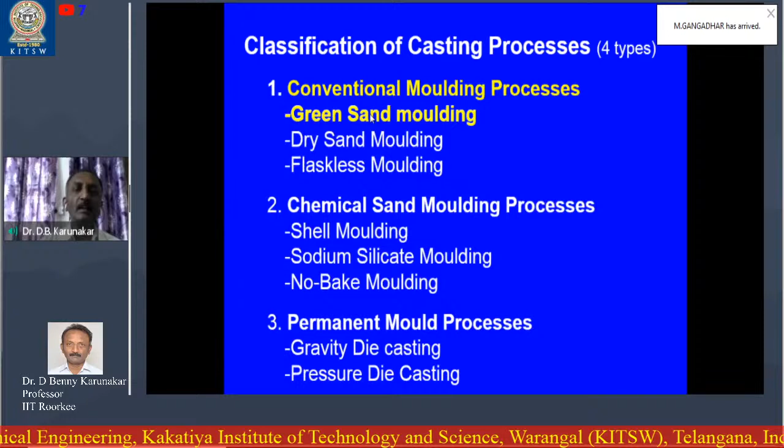Next, let us go to the challenges in the sand casting process. Now, first one is the green sand molding process. First of all, what do you mean by green? Green means the presence of moisture. When moisture is present in the sand, we call it green sand molding.

So this is how a green sand mold looks like. Generally we use two molding boxes - one is the drag, another one is the cope. And this is the cavity, a cylindrical cavity you can see here, and this is the core. Molten metal is poured through this pouring cup - this is the sprue, and it falls into the sprue well.

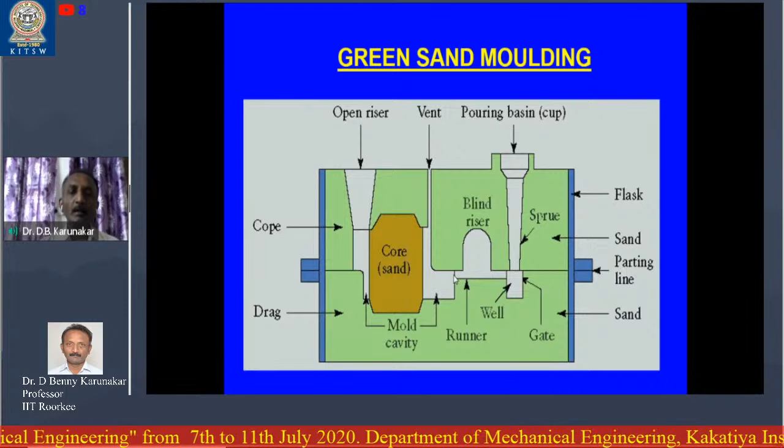This is the runner, and it passes through the runner, flows around the core like this and rises. Here it solidifies, and after solidification we have to break the sand, separate the cope and drag, and we even have to destroy this core. Then we have to take the casting outside.

Here, green sand molding looks like this. This is the lower box, the drag, and this is the upper box, the cope. Molten metal is poured into the mold.

Now, advantages of green sand molding: most of the metals can be cast by this method - most metals and most alloys can be cast except titanium alloys. Pattern costs and material costs are relatively low, and there is no limitation with respect to size of the casting.

A small casting, maybe of the order of 0.5 kgs or even 200 grams, can be made by sand casting. And even a casting up to the weight of 5 tons, even 10 tons, can be manufactured using sand casting.

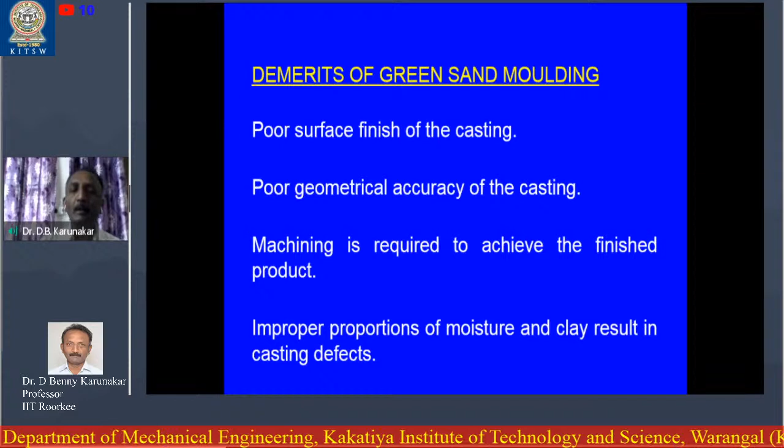So these are the demerits of the green casting: poor surface finish, in that there is no doubt. Poor geometrical accuracy, machining is required to achieve the finish on the product, and improper proportions of the moisture result in casting defects.

Next one is the dry sand molding. This dry sand molding is the green sand molding only, but it is modified in the sense that before pouring, the moisture is totally dried out. The mold is baked in an oven at about 200 to 310 degrees centigrade. The reason is the moisture in the mold may react with the molten metal and form gases and porosity defects, gas defects inside the casting. So to prevent this, we use the dry sand molding.

Advantages of the dry sand molding: defects that arise due to the moisture will be eliminated in this case. What are the demerits? Drying of the mold requires oven and they consume power, electricity.

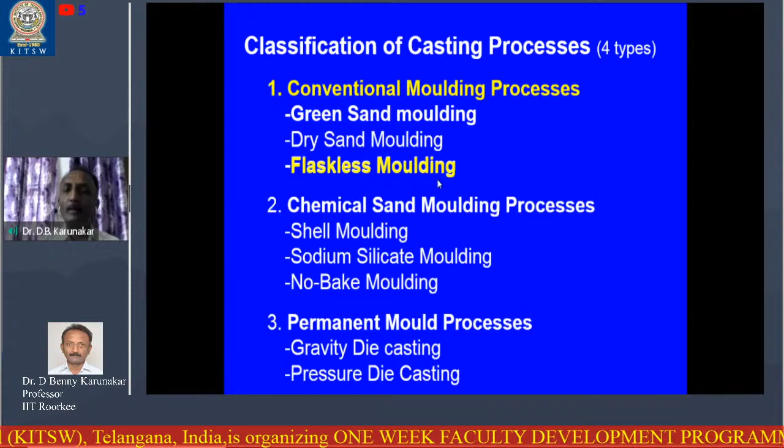Next one is the flaskless molding. What do you mean by flaskless molding? In the other two cases we have used the flask, the cope box, the cope, and these are the drag - these are the molding flasks. We are using molding flask, but here in flaskless molding, we don't use any molding box or any flask. You see here, this is the molding sand, comes like through this.

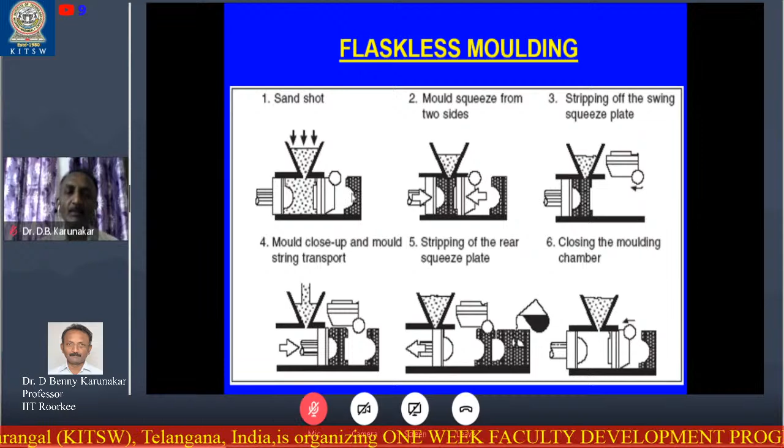And here, this is the pattern of molding sand. Mold and they are assembled here. In a similar way, they are produced and they are assembled. Molten metal is poured. When the molten metal is poured, do you think any flask is supporting the mold?

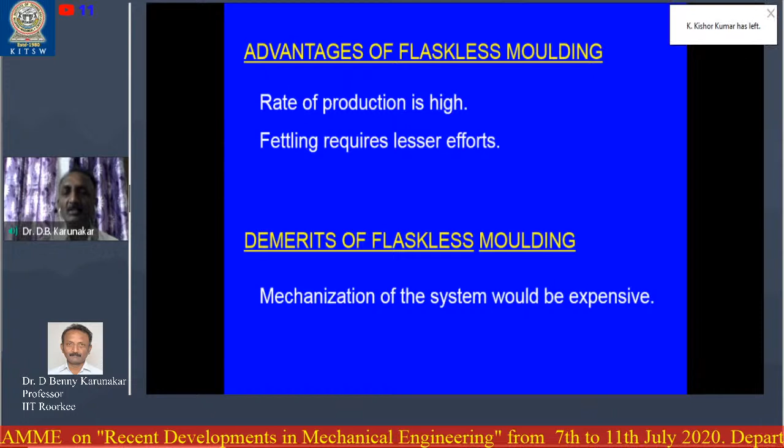No flask. So that's why this is known as the flaskless molding. Advantage of the flaskless molding: the rate of production is high and fettling requires lesser efforts. Why? When the molding box or the molding flask is there, destroying or breaking the mold is difficult. Here it is very easy. And what is the demerit? The demerit is the system requires mechanization, so that increases the initial establishment cost.

So now let us come to the challenges in the sand casting process, or the casting defects. So what is a defect? First of all, a defect is an irregularity in the casting process that is undesired, any irregularity that is undesired. So some defects can be tolerated while other defects can be repaired, otherwise they must be eliminated.

What does it mean? Some defects can be managed - even if the defect is present, still you can work with that, that is the tolerated. Some other defects can be repaired - for example, there is a crack on a big casting, a small crack, so that can be welded, that is the repairing. Sometimes the crack is too big or there is a severe shrinkage porosity defect - in that case, there is nothing we can do except that it should be rejected and melted inside the furnace again.

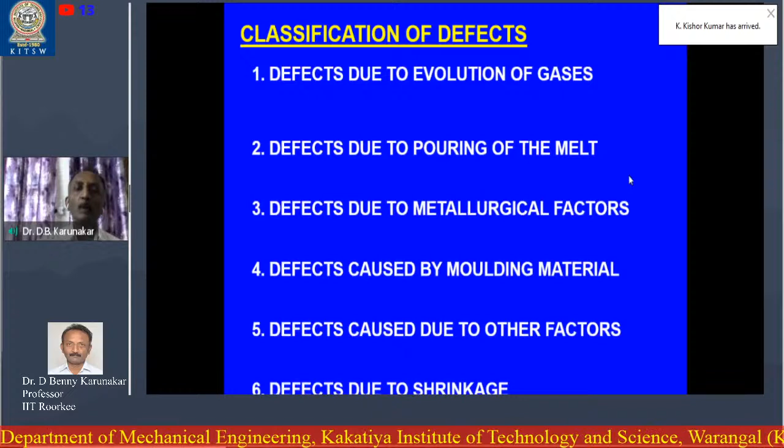Now, let us see the classification of defects. The defects in sand castings can be broadly classified into 6 types: one is the defect due to the evolution of gases; next, defect due to pouring of the melt, meaning something is wrong in the molten metal; next, defect due to metallurgical factors; next, defects caused by the molding sand, meaning something is wrong in the molding sand; next, defect caused due to other factors; and defect due to shrinkage.

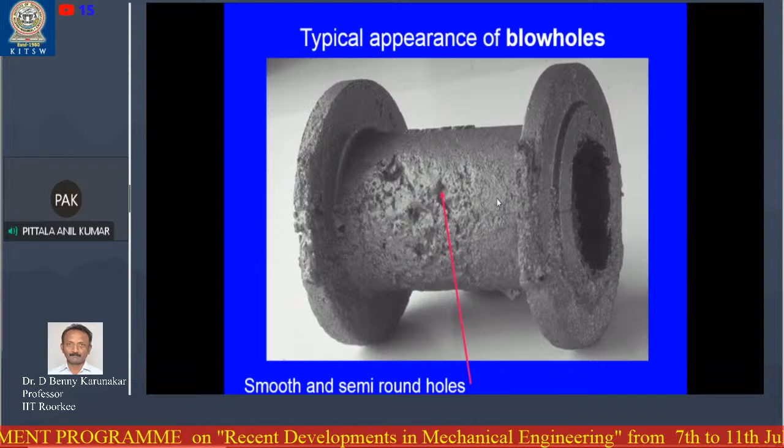So that being the case, the casting has to be rejected. There is no point in accepting this, and it leads to loss to the industry. Now, what are the causes?

Excessive moisture in the mold, slag in the molten metal reacts with the carbon and liberates carbon monoxide, and iron oxide on the mold reacts with the carbon in the metal and liberates CO. So this CO is responsible for the blowhole.

Not only CO, the excessive moisture. So when excessive moisture is present in the molding sand, this moisture comes in contact with the molten metal and turns into vapor.

Similarly, the slag in the molten metal - what is this slag? The slag in the molten metal contains silicon dioxide that reacts with the carbon and forms carbon monoxide. Same is the case with the iron oxide, FeO. So from there, the oxygen reacts with the carbon in the molten metal and forms carbon monoxide.

Now, what are the remedial measures? Provide vent holes, and excessive moisture should be avoided. Excessive compaction should also be avoided. Once you compact too much, what will happen? The mold becomes too hard, the permeability comes down, and the moisture and gases cannot escape.

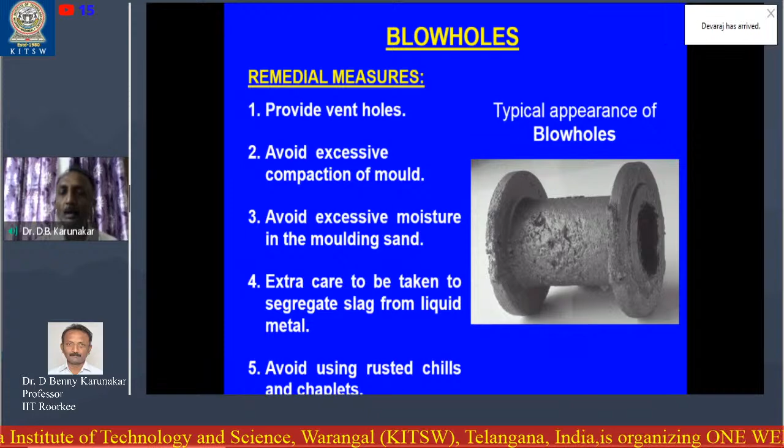Extra care should be taken to segregate the slag from the liquid metal and avoid using rusted chills and chaplets. We use chills and chaplets in the casting process. Why? Chills are used to enable directional solidification, and chaplets are used for supporting the cores.

Sometimes these are rusted. Rusted means that is iron oxide. So once there is iron oxide, there is an oxygen component, and that oxygen component reacts with the molten metal and forms carbon monoxide.

Next, let us see the pinhole porosity defect. This is the typical appearance of pinhole porosity. You can see a large number of uniformly dispersed tiny holes, meaning the size of each hole will be as small as the head of a pin. That is the meaning of pinhole porosity. Too many such holes are there.

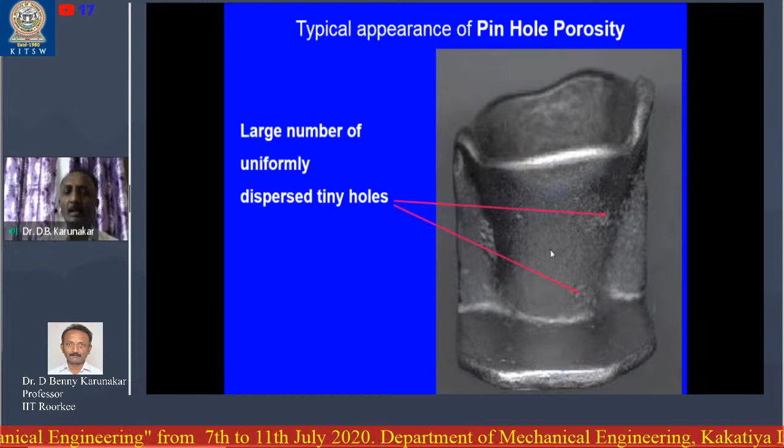The reason is hydrogen is the element responsible for the pinhole porosity defect. The molten metal, especially if you consider aluminum alloys, readily absorbs hydrogen. So this hydrogen, while melting, is absorbed by the molten metal and it comes along with the molten metal, and while the hydrogen is still present inside the molten metal, we pour. During solidification, this hydrogen slowly comes out and forms pinhole porosity on the surface of the casting.

Remedial measures: vacuum melting, meaning the charge or the unmelted alloy is to be melted in a vacuum. Next, if you are not able to use a vacuum furnace since it is very costly, you can use ordinary melting and go for vacuum degassing.

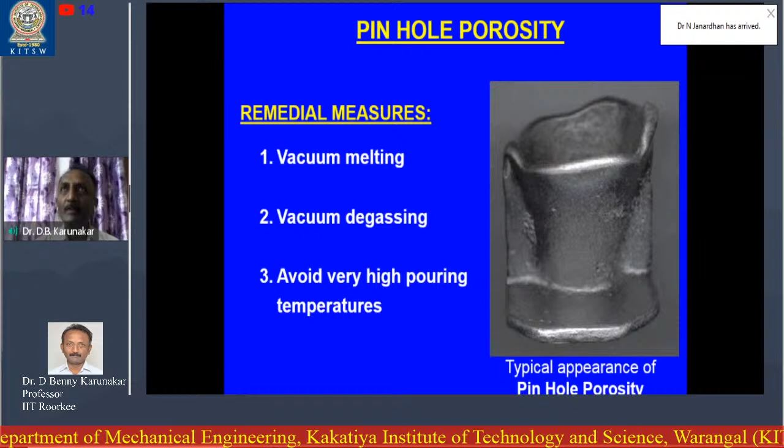Next, avoid very high pouring temperatures. We always give superheating. For example, the melting point of aluminum is 660 degrees centigrade. Beyond that melting temperature, we heat by another superheat, maybe another 75 degrees, up to 725 degrees, or in the worst case up to 750 degrees centigrade. What happens if someone heats it up to 850? It overboils, then it accumulates air bubbles inside, and that could lead to pinhole porosity. So the superheat should be optimum, not too much.

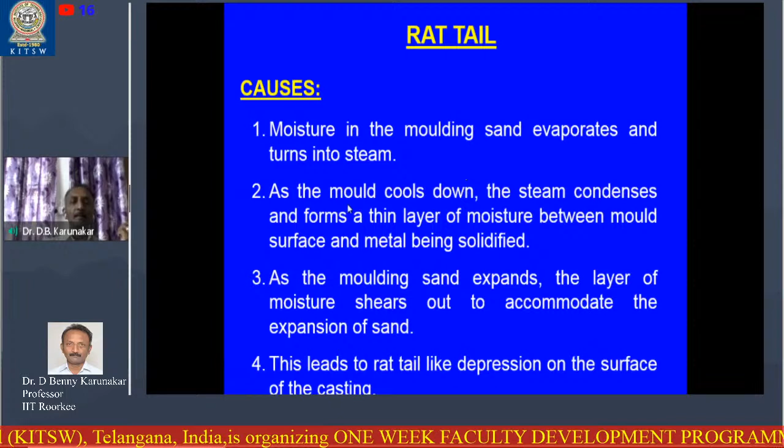Next, let us see the rat tail effect. It looks like an irregular depression on the surface of the casting, similar to a rat tail impression. What are the causes? Moisture in the molding sand evaporates and turns into steam, and this steam forms a thin layer between the mold surface and the metal casting while it is being solidified. Finally it leads to a defect like a rat tail.

So what are the remedial measures? Measures should be taken to reduce this defect. Additives like wood flour can be added to the sand to reduce the mold sand expansion, since this defect arises due to the molding sand expansion.

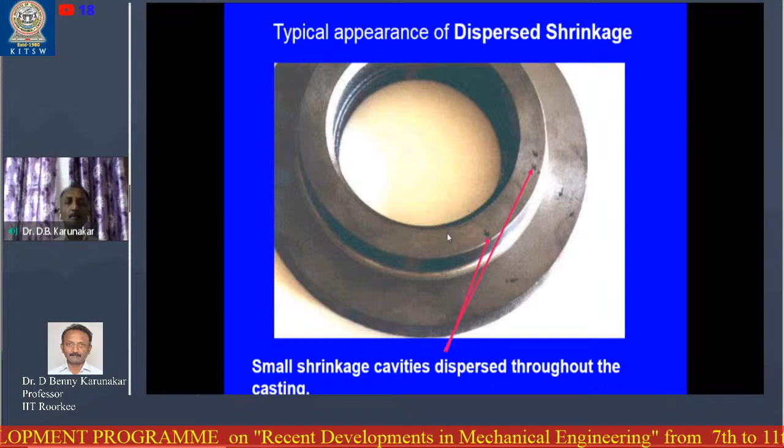Next, let us see the dispersed shrinkage. It looks like this - small shrinkage dispersed cavities throughout the casting. What are the causes? Excessive moisture and very high pouring temperature.

What are the remedial measures? Appropriate moisture and pouring temperature should be maintained.

Next, the blister. You see, this is the typical appearance of a blister on a casting, no doubt. You can see something like a bubble-like bump here, so this is the blister.

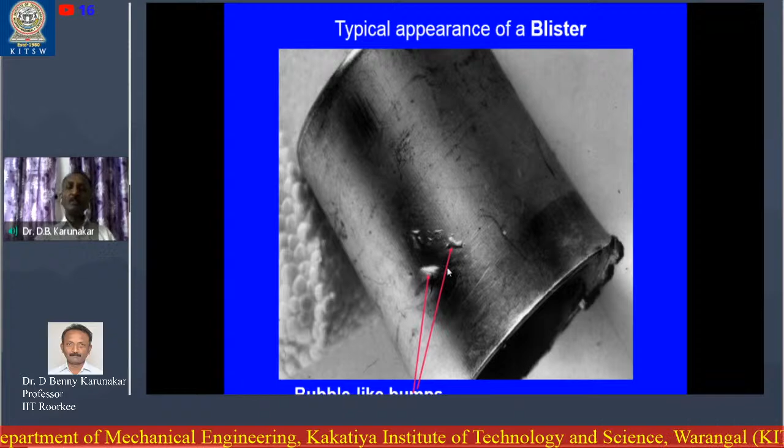What are the causes? Gases trapped in the cavity cause depressions on the mold surface. This happens because the strength of the mold is very poor, meaning the compaction is not sufficient, resulting in insufficient strength of the mold cavity at some locations.

Remedial measures: ensure sufficient and uniform compaction of the mold. So we have completed the first category, defects due to the evolution of gases.

Next, let us see the defects due to the pouring of the melt. Under this category, we have misrun, cold shut, elephant skin, and inclusions. Let us see all these one by one, starting with misrun.

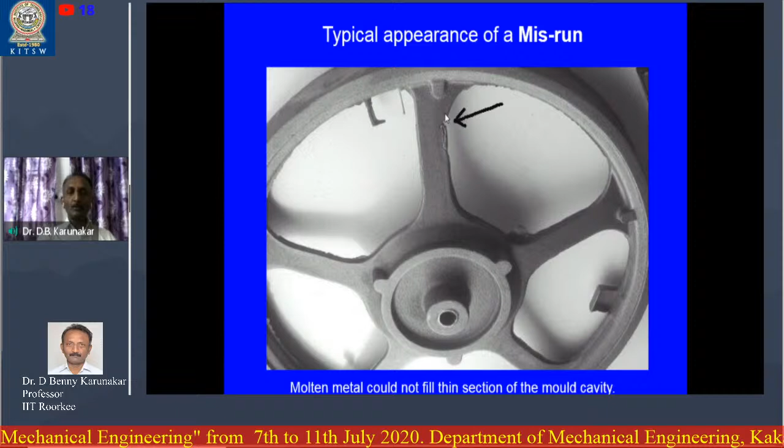Now the question is, why does it arise? What happened exactly? The molten metal was not able to flow properly in this region, so that is the reason for this misrun. Here again you see there is a discontinuity. Molten metal could not flow properly, so this is the misrun.

Now again you see, there is a discontinuity here. So this is the misrun defect.

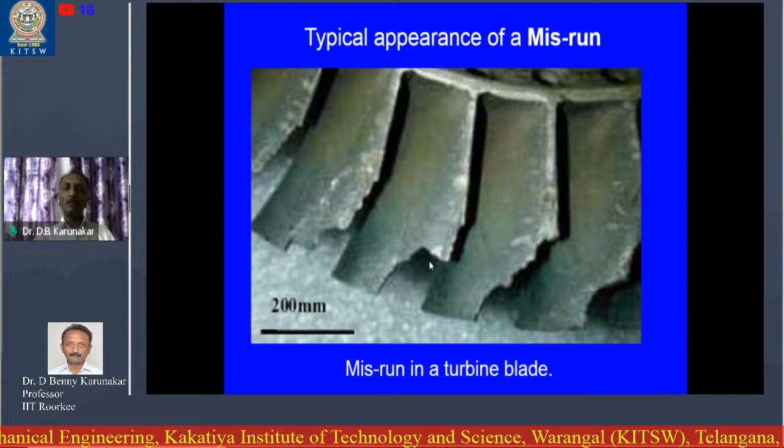Now this is a turbine blade, and the blade is supposed to have this profile, like this, but there is a discontinuity. Again, same in this case here. This blade should be like this, but there is a discontinuity. Why? The cross section or thickness of this fluid path is very small, so the molten metal could not flow through that thin section. That is what exactly happened.

Now these are the causes: insufficient fluidity, low pouring temperature, too small ingates, and low pouring speed.

Now what are the remedial measures? Increase pouring temperature. Remember, in casting we come across two temperatures: one is the melting temperature and the other is the pouring temperature. Melting temperature is just enough to melt it - maybe if you melt aluminum up to 660 degrees centigrade, it starts melting.

But that is not enough to pour. If at 660 degrees you start tapping, the moment you tap, it solidifies. So it should be at a higher temperature so that you can carry it to the mold and pour it. That higher temperature is the pouring temperature, maybe 725 or 750 degrees.

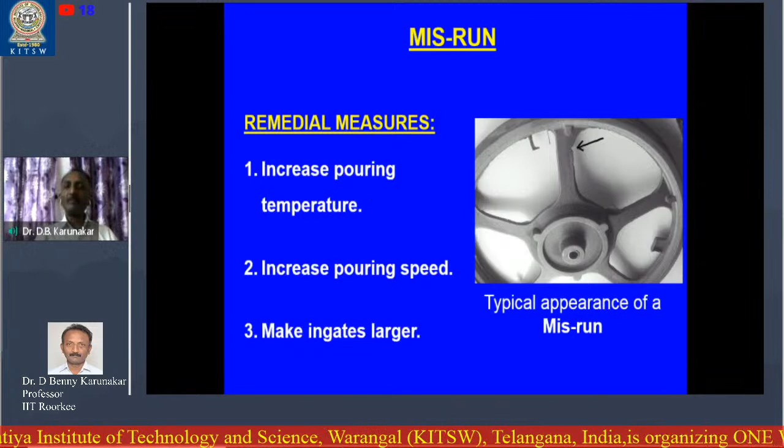So as you increase the pouring temperature, what happens to the fluidity? The fluidity will be increasing, the viscosity will be decreasing. So fluidity will be increasing, and the pouring temperature should be increased.

Next, increase the pouring speed. That also will help us minimize this defect. Make ingates larger. With this we can minimize or prevent the misrun defect.

Next one, cold shut. What is cold shut? Now you can see a casting here. Here is one ingate - you can imagine a runner in front of this casting, and above the runner there was a sprue.

Through that sprue molten metal is poured, and through the runner molten metal is supplied to this ingate. And these two streams are coming together inside the molding cavity - they will come together and these are to be mixed perfectly without any discontinuity.

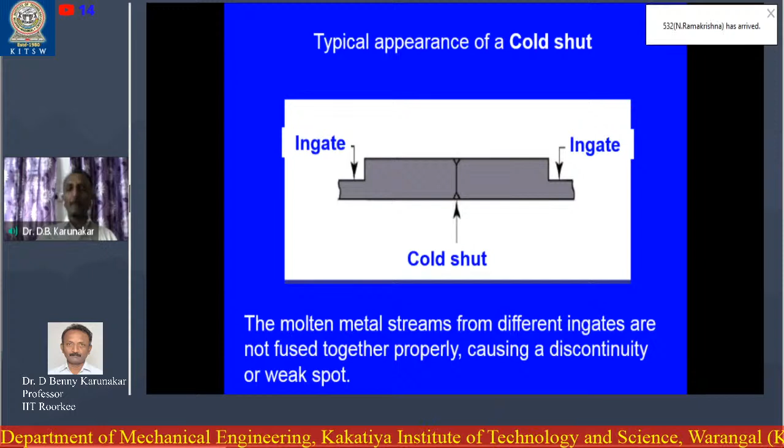But it so happened that there is a small hidden and invisible separation, a discontinuity. So when we break this mold and take a single casting, apparently we don't see any discontinuity or separation, but internally there is a separation. So when we use this component in practical application, it will fail. That is the cold shut. Now, why is it happening?

Longer distance between the ingates - that is the main reason. Next one, large surface area to volume ratio.

Now suppose the distance is too much, then what will happen? Initially the molten metal had sufficient temperature. The temperature was high, so because of that the fluidity was high. But as it was coming closer to inside and inside, it comes in contact with the molding surface. Then its temperature slowly comes down. By the time it comes to the center point, the temperature has almost come down, almost come to the melting temperature.

And the other stream comes, and the temperature of these two streams is too small that they are not able to mix with each other. That is how this discontinuity is arising. So the longer distance between the ingates should be avoided. Try to maintain minimum distance between the ingates.

Next reason is the geometry of the casting is such that it has large surface area. It is possible that for the same mass or weight of the casting, one casting can have large surface area, another casting can have small surface area. In the first case, the casting having large surface area is in contact with the molding surface, the molding sand.

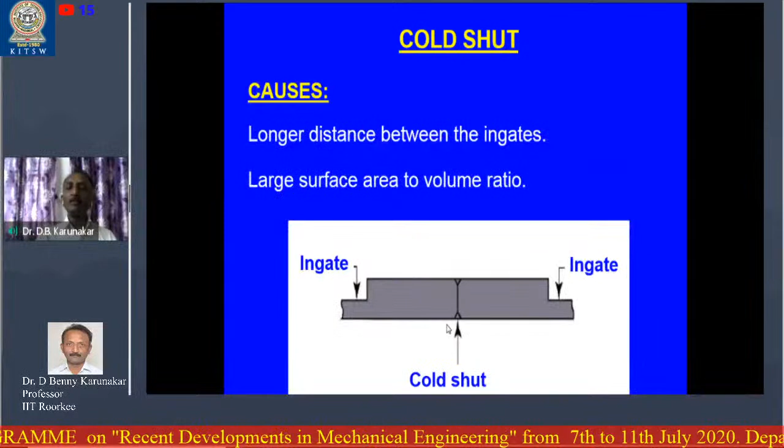Then what will happen? Maybe two streams are coming, and the distance may not be too much - the distance is fair and acceptable - but because the casting's surface area is too much, it has already dissipated heat to the surroundings, and by the time the two streams come to the center, they have lost their heat energy, and the fluidity has abruptly come down, and these two streams are not able to mix with each other. So finally there is a discontinuity between these two streams. So large surface contact area is another reason for the cold shut.

Now, how to prevent this cold shut? Use more number of ingates - instead of using 2 ingates, you can use 4 ingates. Next one, increase the pouring temperature. So with these remedial measures, we can prevent the cold shut defect.

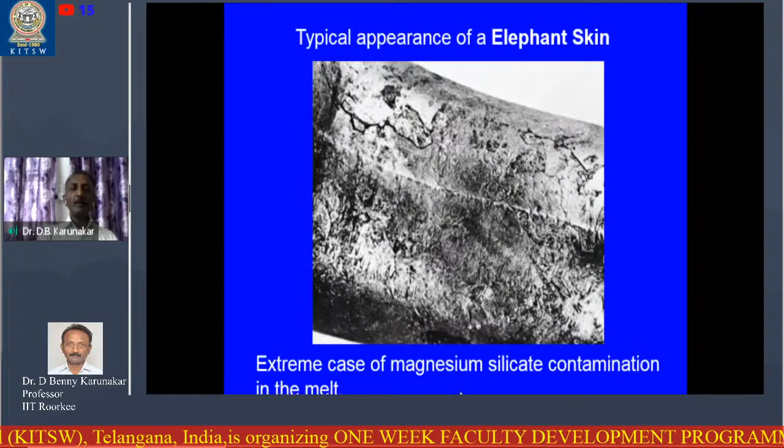Next one, elephant skin. What is this elephant skin? If it looks like this, it's an extreme case of magnesium silicate contaminated in the melt - you see it looks like this. It's a rare defect, rarely used, rarely spoken about, rarely feared. The melt is contaminated by the magnesium silicate and it is deposited on the casting surface like this.

Ensure proper separation of the slags. So that's a slag, and it should be removed from the melt.

Next one, inclusions. Now what is this inclusion? Undesirable foreign material present in the metal - those foreign materials could be oxides, slags, or dirt. They come along with the molten metal, enter into the cavity, and after the casting is solidified, they are deposited on the surface of the casting like this.

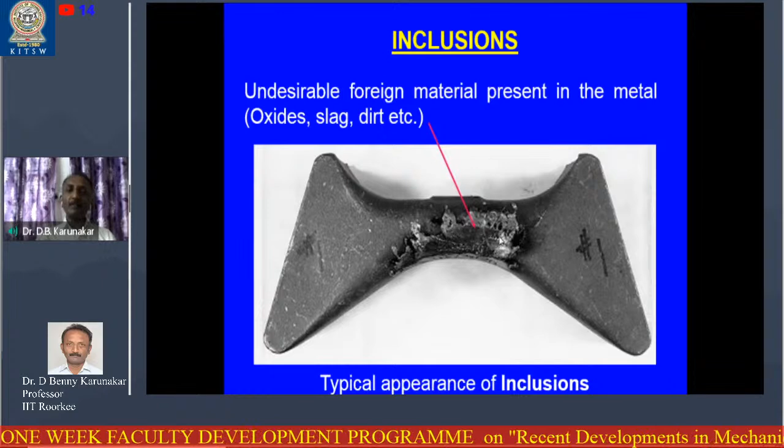So these will be peeled off, and ultimately we see a depression on the casting or a discontinuity on the casting. That is the final result of this inclusion. So this inclusion must be removed from the casting.

And here you can see this is the inclusion defect. What are the main sources of inclusion? Slag, metal oxidation products, refractory materials, refining agent residues, molding materials, and erosion products of the mold.

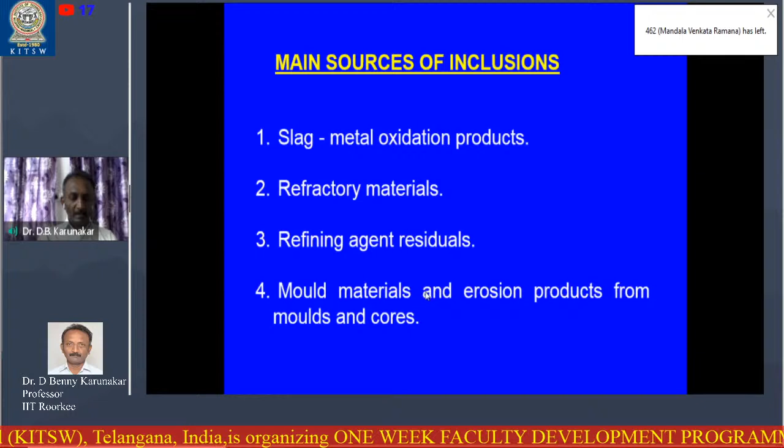So they all come along with the mold and they are deposited somewhere on the surface of the casting. So these are known as the inclusion. Certainly these cannot be accepted on the surface of the casting or inside the casting.

Now these are the sources: eroded paints, endogenous inclusions, non-dissolved inoculants, and many more.

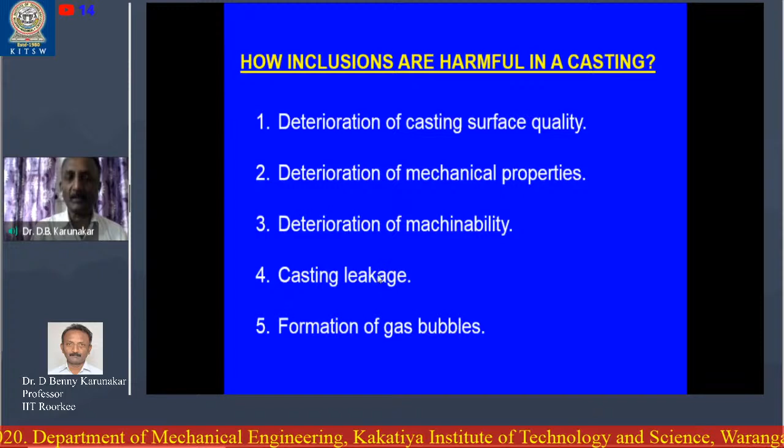How are these harmful? Deterioration of the casting surface quality - that is one bad effect. Another one, deterioration of the mechanical properties. If these inclusions go inside the casting, the mechanical properties will be altered. Deterioration of the machinability - if it appears somewhere on the surface or on the machined portion, machining becomes a difficult task. Next, casting leakage and formation of gas bubbles.

Choosing a molding sand with adequate strength, and the most important thing is placing ceramic foam filters inside the gating system. Once we place these foam filters inside the gating system, all these unwanted oxides or foreign materials will be removed.

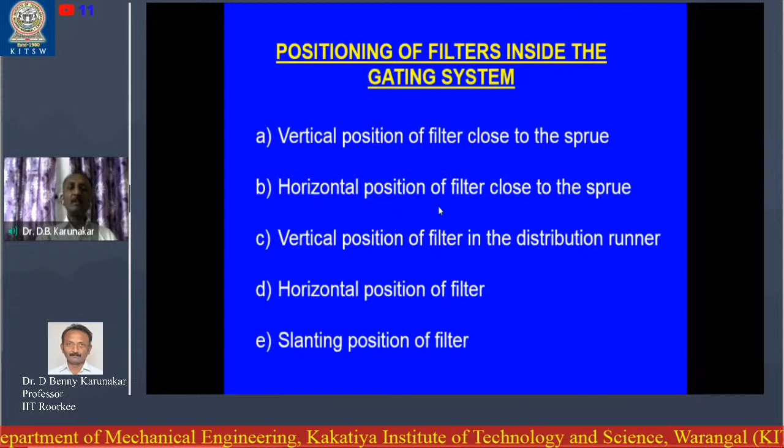Now, this is the position of the filters, where we can place the filters: vertical positioning, horizontal positioning, and the slanting position of the filter.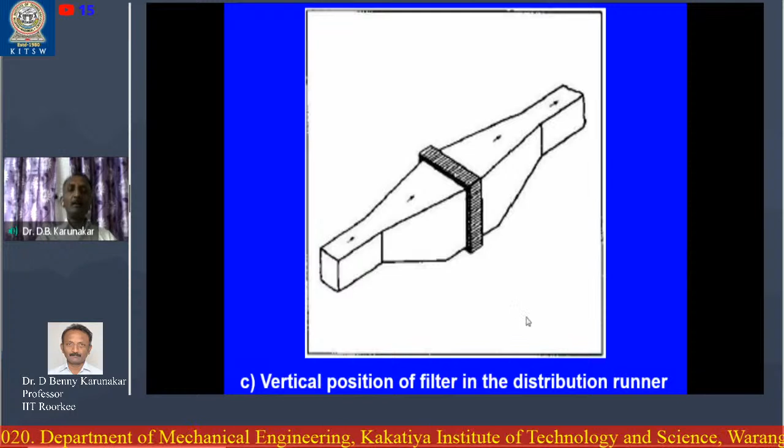Next, horizontal positioning - you can see there is another position where the filter can be placed this way too. Next is the vertical positioning of the filter in the distribution system; somewhere here you can place the filter. Another horizontal positioning option, like this. And next, the slanting position, like this.

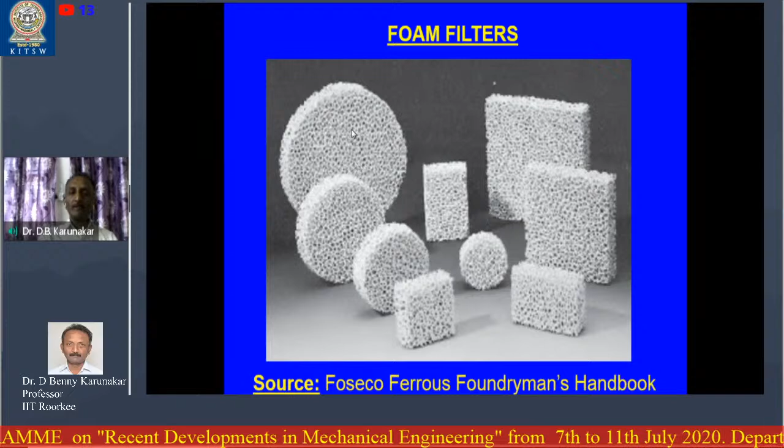Now these are the foam filters. They look like this. They are available in different sizes and different shapes - circular shape, rectangular shape, and square shape, in different sizes. It all depends upon your requirement - what is your requirement, what is the size of your gating system. Accordingly, you can go to the market and purchase the foam filters as per your requirement and convenience. These foam filters are to be kept inside the gating system.

Once you place these foam filters inside the gating system, the inclusion problems can be avoided almost entirely. Yes, these are the foam filters. You can see here, a foam filter is kept in a horizontal position.

Now, until now, you see this is the sprue, and through the sprue the molten metal is poured. There's another advantage of this filter - until now the molten metal is traveling in a turbulent flow, but once the molten metal passes through the filter, you will see a laminar flow, which is good.

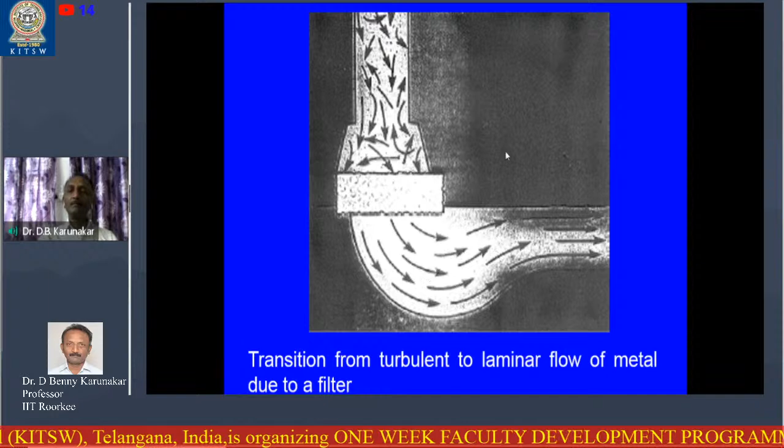So we have completed the first two categories. Now let us come to the third one: defects due to metallurgical factors. Under that we have the hot tears. What is a hot tear? A hot tear is a crack arising during solidification.

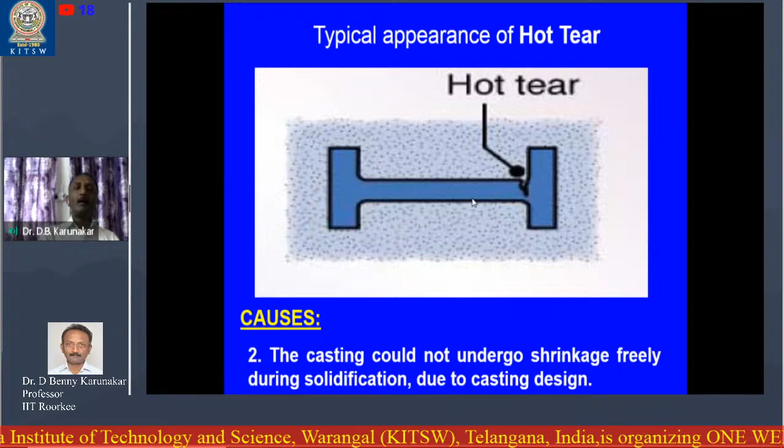Next reason: the casting could not undergo shrinkage during solidification due to the casting design. You see, this casting has two vertical ribs joined by a horizontal rib, and the whole thing is inside the sand mold. Now it can so happen that the inside rib is more exposed, its surface area is more, so it solidifies quickly.

It solidifies quickly, then the contraction starts - it wants to contract. But what happens? The vertical ribs are fixed, and they are not allowing the contraction of the central rib. Again there is a conflict, and because of that, again there is a hot tear.

It also contains sulfur, 0.06%. Actually, that can also be avoided by the industrialists, but they allow it. Why? This sulfur improves the machinability. When we are machining, this sulfur enhances the machinability. So they allow this small amount of sulfur, that is 0.06% of sulfur.

Now, it can so happen that without your intention, the sulfur content becomes more than 0.06%. Then what will happen? It influences hot tearing. Next, the fourth reason is the long freezing range. It influences the hot tearing.

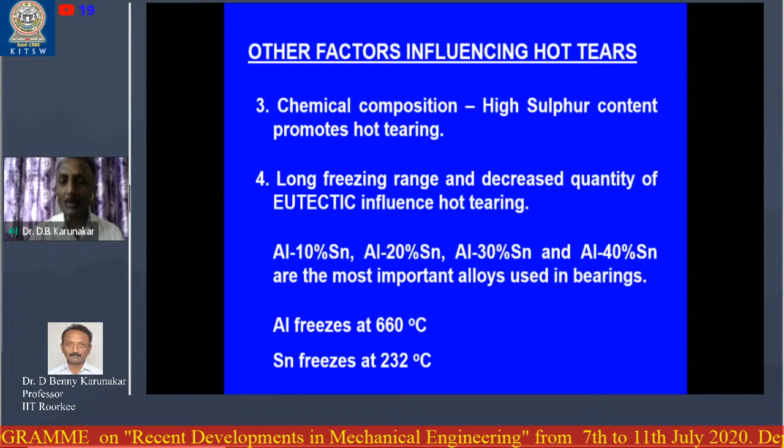So these are the remedial measures for hot tearing. Use exothermic pads. Suppose the inner section has already solidified and wants to undergo contraction, but the other portion is not. So you can put an exothermic pad around the inner section. Because of this pad, heat dissipation will be slower, taking longer for solidification, so it solidifies parallel along with the other sections. The whole casting solidifies at a time, not different regions at different times, so this problem won't arise.

Second reason is to control the composition and minimize the sulfur content in the liquid metal. It doesn't mean you should totally avoid it.

Next, use grain refiners. We have grain refiners available in the market like aluminum 8 boron, aluminum 3 boron, aluminum 3 titanium, aluminum 5 titanium 1 boron. These can be added to the liquid metal while it is still in the furnace, in an extremely small amount, maybe 1%, or in the worst case 2%. When you add these grain refiners, the coarse grains will be made finer, and these finer grains help prevent hot tearing.

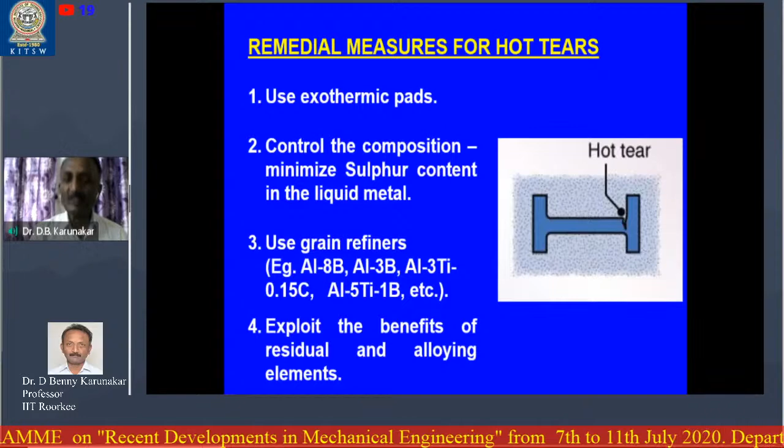Later we added iron. We made an aluminum 30 Fe master alloy, and out of that we added 6% of this iron master alloy to the casting, meaning to the aluminum 1% tin composition. This iron helped prevent the hot tearing. Then we started investigating how the addition of iron helps reduce or prevent hot tearing.

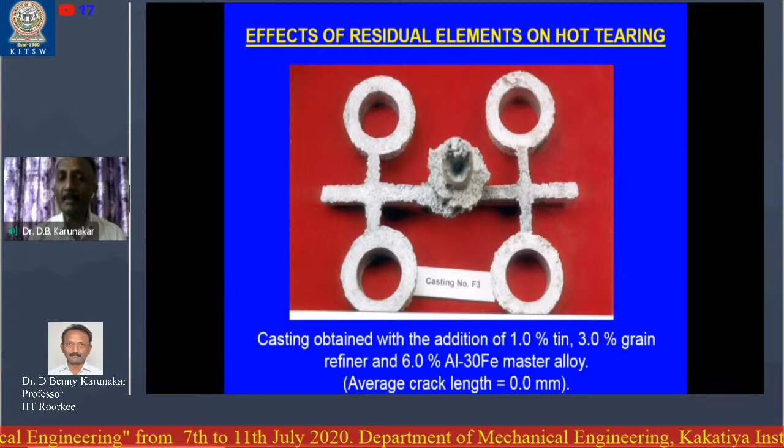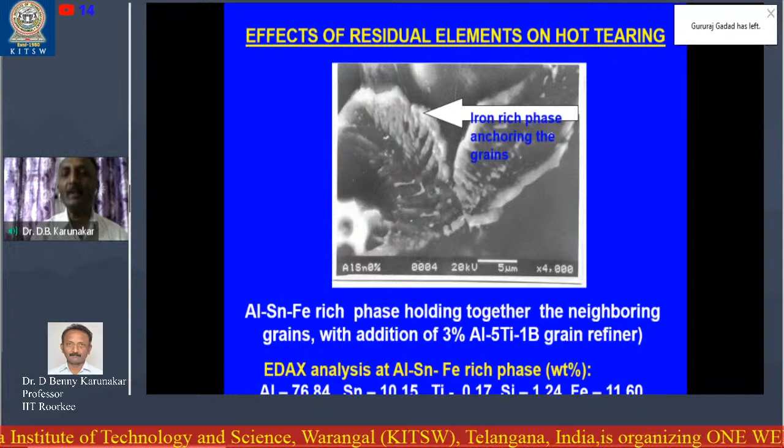Sometimes there were cases where, because the commercial aluminum contained some small amount of iron, people rejected it. Now we recommend that you need not reject it. If there is a small proportion of iron in the commercial aluminum, like up to 0.5% or 1%, that will help prevent the hot tearing.

Similarly, another investigation we have made. We have added nickel to the aluminum 1% tin. When we added nickel, again you see there was no hot tearing.

It was like this. We have investigated why, with the addition of nickel, the hot tearing has completely gone. When we investigated under the SEM, we see again a hard aluminum nickel-rich phase here.

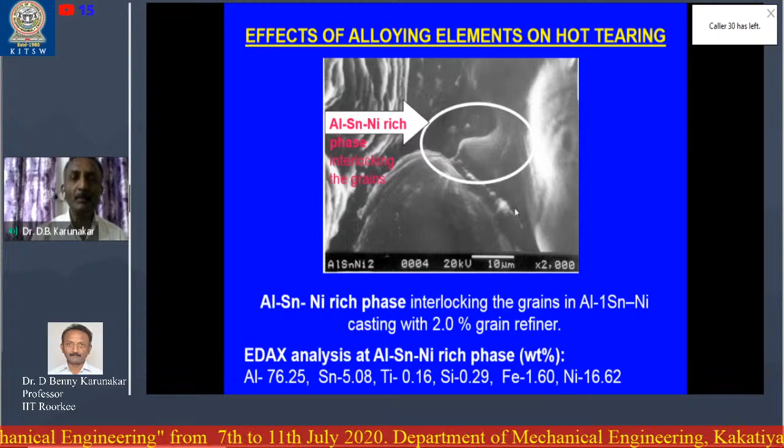We have analyzed under EDAX. You see, this is tin proportion 5% and nickel 16%. And this nickel freezes at about 800 degrees centigrade.

What about aluminum? It freezes at about 600 degrees centigrade. This nickel freezes at about 800 degrees centigrade.

So before the aluminum started solidifying, the nickel grains have already solidified. They have become hard and strong. When the aluminum grains started undergoing solidification, and after solidification was over, when they were about to become smaller or undergo contraction, this nickel-rich phase was holding them together and prevented any further movement. That is how the hot tearing was prevented.

Now, nickel is a common alloying element. So fortunately, this nickel helps us to prevent hot tearing in aluminum castings.

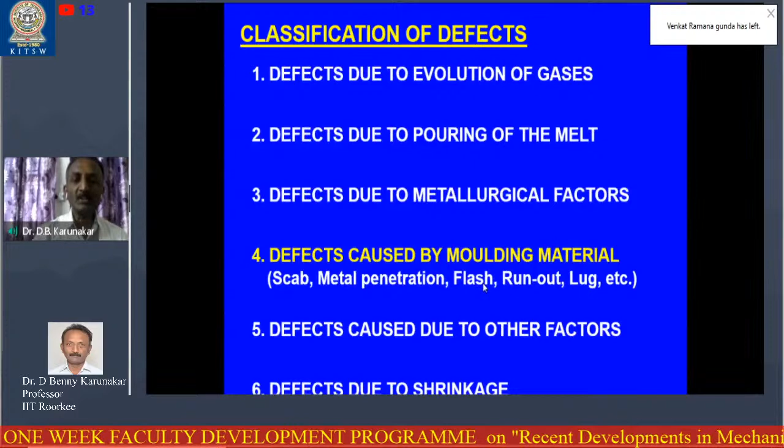Next, let us see the molding defects caused by the molding materials. Under that, we have scab, metal penetration, flash, runout, and lug. First, let us see the scab.

So a scab looks like this. This is the surface of the casting, and above the surface you can see a thick deposition. What is this deposit? This deposit is a mixture of molten metal and molding sand, meaning it has become a hard ceramic, hard lump deposited on the surface of the casting.

Now, this is very difficult to remove. If you try to machine it, since it has become a ceramic, it is very difficult to machine. So this defect is known as the scab.

Now, what are the reasons or causes? Low moisture content in the molding sand, below 3%, so the molding sand was loosely bound. Another reason could be low clay content, insufficient clay content.

So we have to add sufficient moisture content and sufficient clay content, so that when we mix the molding sand, the particles stick to each other very tightly. There should not be any loose contact. But it so happened that the moisture content is less, the clay content is less, so the sand particles are not bound perfectly.

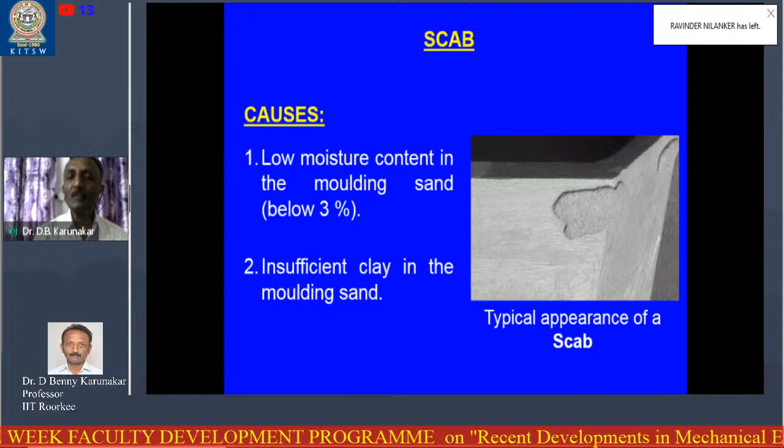They are loosely bound. So when you pour the molten metal, it flows through the gating system. As it passes through, it pulls the sand particles because they are loosely bound, and those sand particles are carried along with the molten metal into the mold cavity, where they are deposited and solidified on the surface of the casting. That is how the problem arises.

How to prevent this? Regulate the moisture and clay content. Don't use too much moisture content, but it doesn't mean you should use too little either. The moisture content should be sufficient. Also, the clay content should not be too much. If the clay content is too much, the mold becomes very hard and strong, and it becomes very difficult to break after solidification, and also the permeability becomes very poor.

So the clay content should not be too small either. If it is too small, defects like the scab will arise. So the moisture content and the clay content should be moderate. They should be optimum.

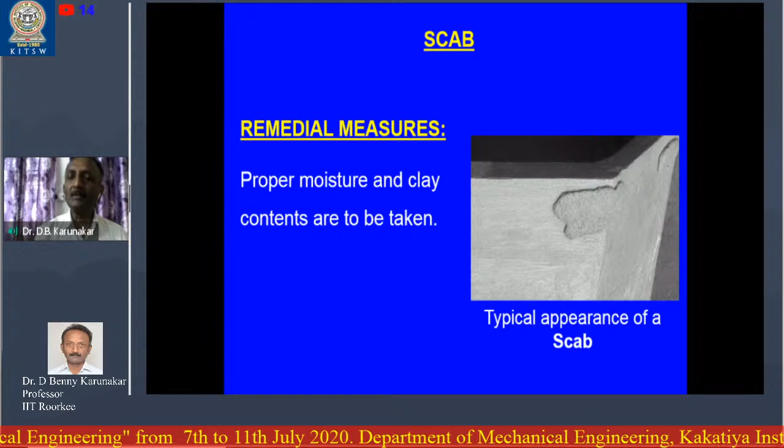Next one, metal penetration. What is this metal penetration?

Yes, again it is similar to scab. You can see a deposit here, an unwanted metal deposit. It is not a deposit mixed with molten metal and molding sand, but it is only molten metal. Why is it happening?

Of course, this can be cut and removed. But why should we waste time to cut and remove it? It is wastage of time, wastage of energy.

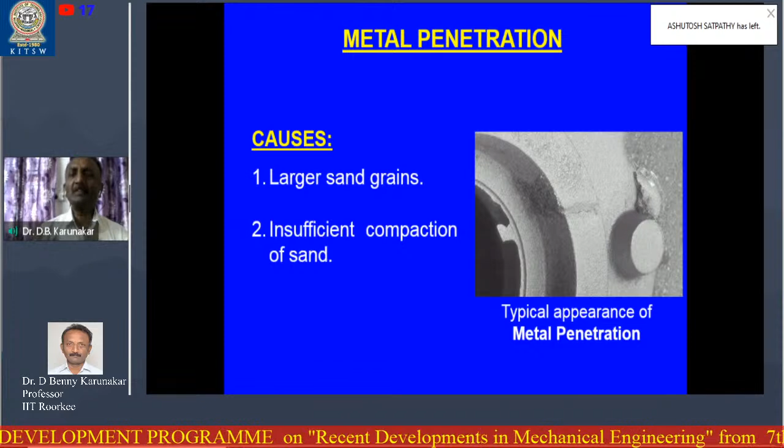Why does it happen? Large sand grains and insufficient compaction of the sand. Sand grains are so large that there is a significant gap between the neighboring sand particles, and molten metal is able to penetrate into that gap. Then the molten metal penetrates into the molding sand, and the unwanted deposit is created on the surface of the casting.

The same thing can happen due to insufficient compaction of the sand also.

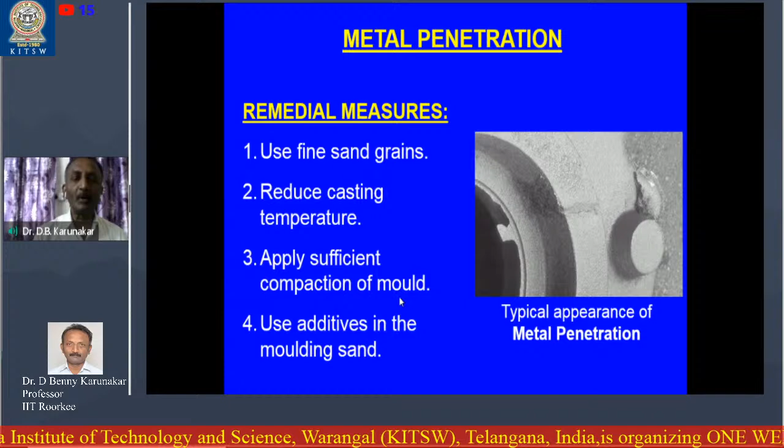How to prevent this? Use fine sand grains, not coarse sand grains. It doesn't mean the sand should be too fine though, because then the permeability will come down. Also reduce the casting temperature, apply sufficient compaction of the mold, and use additives in the molding sand.

Now, what will happen when we use additives? For example, coal dust is one additive. Let us see what happens when we use coal dust. So these are the molding sand particles, the sand grains. To these sand grains, coal dust is applied, mixed in a small amount, maybe 3%. This coal dust makes a coating around the sand particles, like this, like this, like this.

Then these coal dust particles produce carbon monoxide, because coal dust contains carbon. They react with oxygen in the atmosphere and form carbon monoxide.

Now the molten metal is coming. This is the molten metal, and these are the sand grains. Without this carbon monoxide, the molten metal can come and penetrate between the two sand grains and form the penetration defect. But because we have mixed the coal dust, what happened?

The coal dust produced carbon monoxide, and this carbon monoxide is pushing pressure in the opposite direction. The molten metal is coming from the right side to the left side and trying to penetrate into the sand particles, while carbon monoxide is exerting pressure from left side to right side. So the molten metal cannot enter into the small gap between the sand grains. So when we add coal dust, an additive to the molding sand, the penetration defect can be reduced.

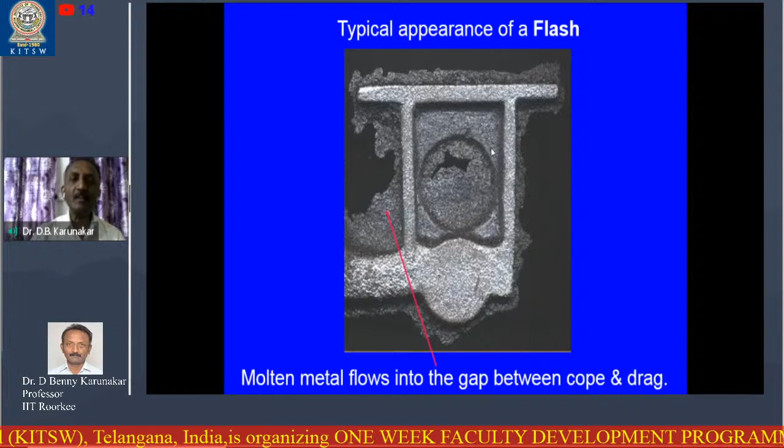Next one is the flash. What is this defect? Yes, it looks like this. Actually, the casting is this one. This is the casting, and this is the region along the parting line.

Between the cope and the drag, there is a space, a line called the parting line. So the surface on the cope box and the drag box should be perfectly leveled, so that when the cope is placed over the drag, there should not be any gap. But it so happened that there was some gap. So when you pour the molten metal, it has filled the cavity, but it has also flowed along that unwanted gap between the cope and the drag.

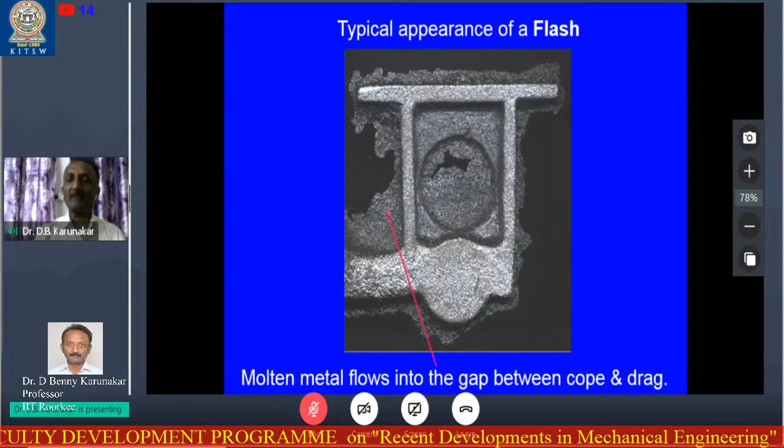Now what to do? We have to put in effort, using some machine, to cut this unwanted portion. So time and energy are wasted. How to prevent that? First of all, the cause is that the sand is not properly compacted along the parting line, so a small gap exists between the cope and drag. So the molding sand should be leveled properly along the parting line. That is the only measure we can take.

Next one, runout. It's a defect similar to flash. What is this runout? You see here, this is the casting, and somewhere the molten metal has run out from the molding box, along the parting line. It has run out and made thick projections like this. These are known as the runout projections.

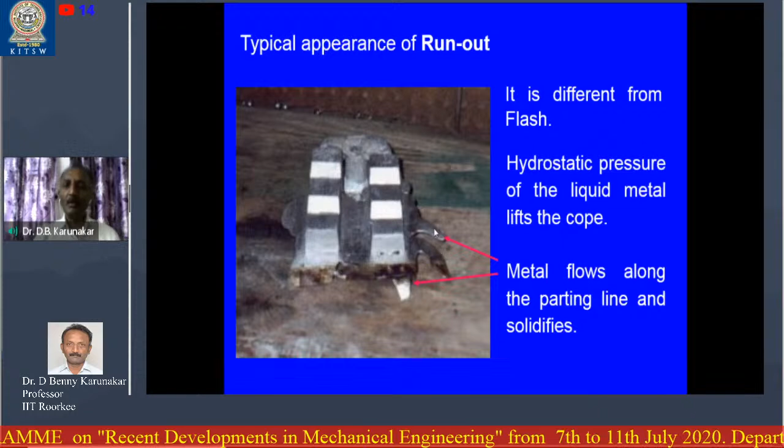Why does it happen? It happens due to hydrostatic pressure. When you pour the molten metal, as it flows through the gating system through the sprue, it exerts hydrostatic pressure, due to which there will be a tendency for the cope to raise up. So during pouring, the cope box may rise slightly for a short time, maybe a few seconds. During that time, the molten metal will be running out and solidifies as a thick projection.

So this is an unwanted case, and it has to be prevented. How to remove it?

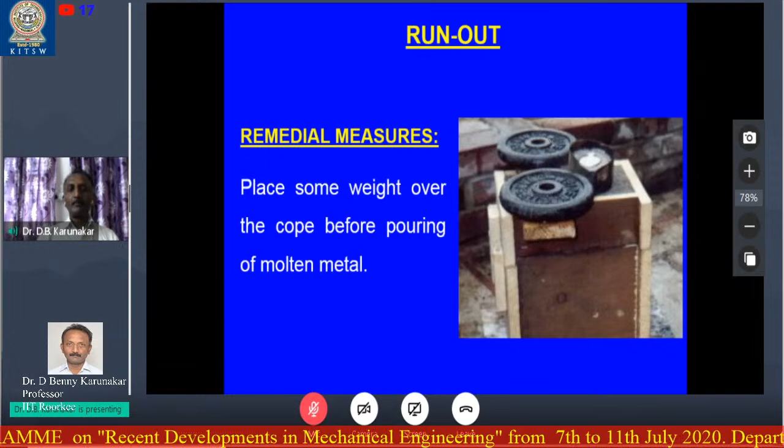Place some weight over the cope before pouring the molten metal. So this is the molding box, you see - this is the drag, and this is the cope. Some weight is kept; in fact, this is the practice in every casting industry. They place weights on the cope so that during pouring, due to the hydrostatic pressure, the cope will not rise up and this runout problem will not arise.

Next one, let us see the lug.

What is this lug? Lug is metal solidified in the cavity surrounding this mold. So this is the lug. This is similar to a defect we have seen earlier, called penetration. Do you remember?

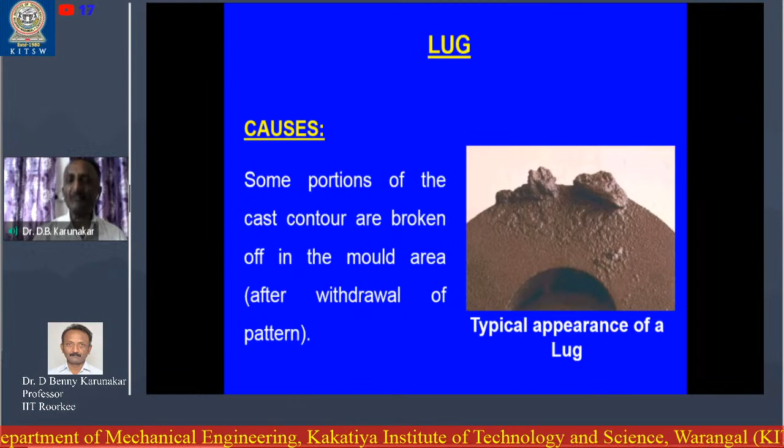Some portion of the cast contour is broken off in the mold area after withdrawal of the pattern. In the previous case, molten metal penetrated between larger sand grains, forming an unwanted deposit, but this is not that case. Here, somewhere inside the molding cavity, some portion is damaged or broken. Because of that damage, molten metal goes and solidifies in an unwanted portion, and that is how this unwanted projection arises.

This can happen if the handling of the molding box is not proper. Check for pressure points and broken up ridges. If something is broken, repair it before the molten metal is poured.

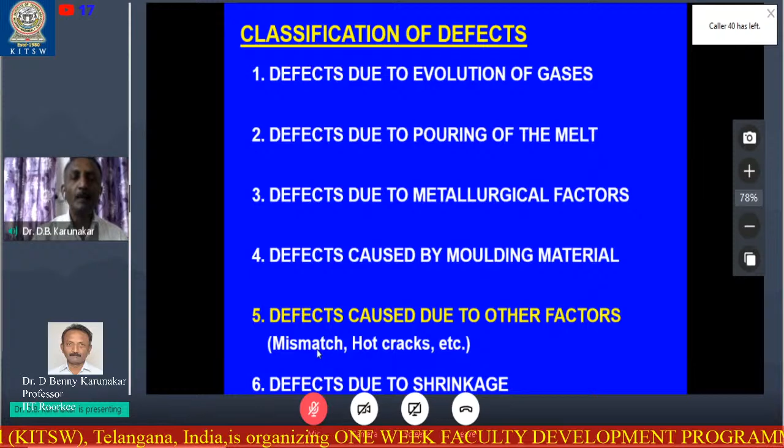Next, defects caused due to other factors: mismatch and hot cracks. First, let us see the mismatch.

Now it is like this. This is a single casting. This much portion is kept in the drag and this much portion is kept in the cope. Strictly speaking, this portion should move maybe 1 or 2 inches. This line should coincide with this line, but there is a shift. This is known as mismatch.

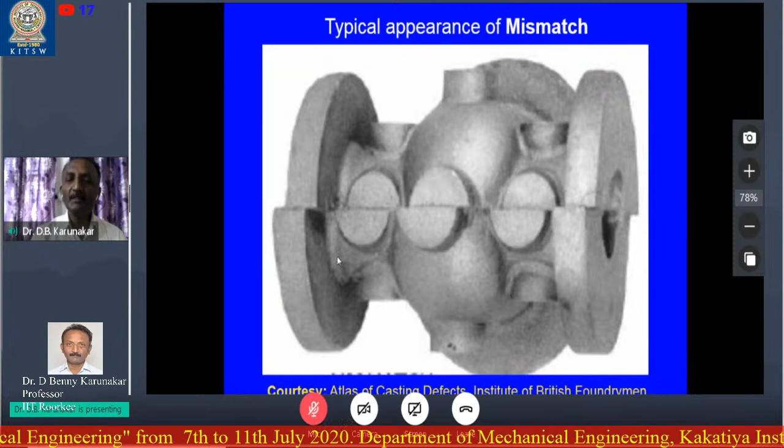Now this casting is useless. It should be rejected and melted again in the furnace. Why does it happen? Again, there is a casting and there is a shift - this portion is cast in the drag and this portion in the cope, and there is a shift.

Misalignment of the molding boxes. The cope and the drag should be perfectly aligned so that there is no deviation, no displacement from the expected positions.

Now, what to do? Ensure proper alignment of the molding boxes. For that, we use dowel pins. Both the cope box and the drag box have brackets with holes. In these two holes, a bolt will be kept, and this bolt ensures that there is no shifting of the cope over the drag. That is the usual practice.

But as you keep using it for several years, imagine there are two brackets for the cope and the drag with holes - maybe the diameter of the hole is 10 millimeters, on both the cope and drag brackets. Through these two holes, a bolt of 10 mm diameter is inserted.

As you keep using it for several years, the diameter of the bolt undergoes wear, becoming 8 or 7 millimeters. So when you pass a bolt of 7 millimeters through a hole of 10 millimeters, what happens? There is always a possibility of a shift of the two boxes by a distance of 3 mm. That is enough - that is how the mismatch problem occurs.

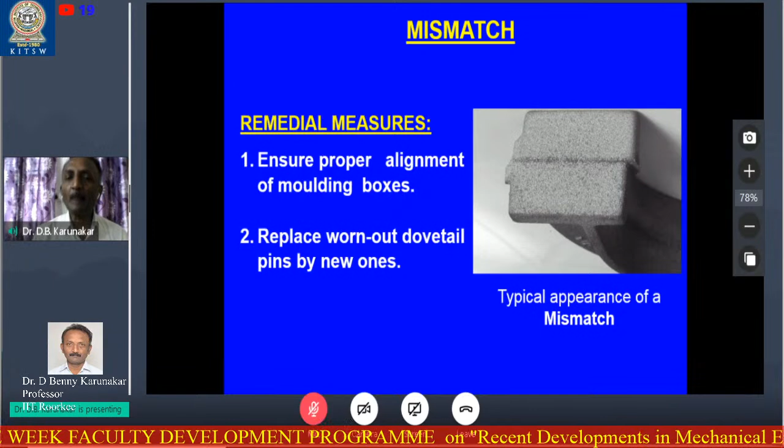So these worn out dovetail pins must be replaced periodically. That is very important.

Next, hot crack. What is this hot cracking? Sometime back we have seen hot tearing, right? So this is hot cracking. What is the difference? Hot tearing arises during solidification, whereas hot cracking arises after solidification. That is the difference.

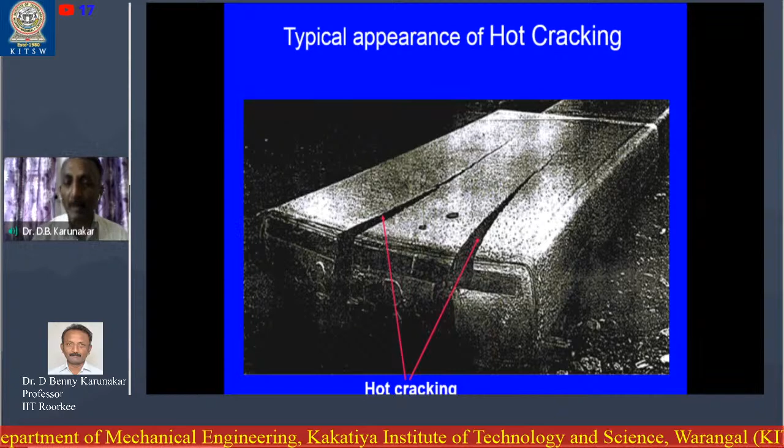Generally this hot cracking arises for very large castings. This is a big casting, so there is a crack, and this has arisen after solidification, not during solidification. What are the reasons?

During cooling in the mold, during knockout - after solidification is over, we break the sand. During the breaking, if it is too rough, it is possible that someone can hit the solidified casting, and it can undergo cracking.

During cooling after knockout, if there is uneven cooling, that can result in cracking. Or during heat treatment, after the casting is taken out, some sections having larger surface area absorb more heat and undergo more expansion, while a neighboring section with lesser surface area absorbs less heat and undergoes less expansion. So there is a difference between the expansions, and that is how this cracking occurs.

So it can also happen due to uneven cooling conditions and differential contractions.

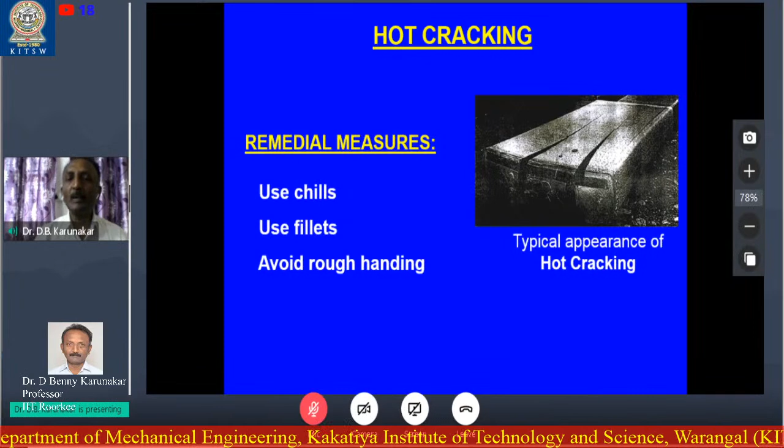Remedial measures: use chills. Chills are steel blocks kept inside the molding boxes so that there will be uniform cooling of the casting. Next, use fillets, which also help uniform cooling. Avoid rough handling after pouring and solidification, especially during the knockout process and the heat treatment process. If careful, this defect can be minimized to a greater extent.

Finally, we are coming to the last category, the defect due to shrinkage. We have completed five categories. Now let us see the last one: defect due to shrinkage, that is, the shrinkage cavity.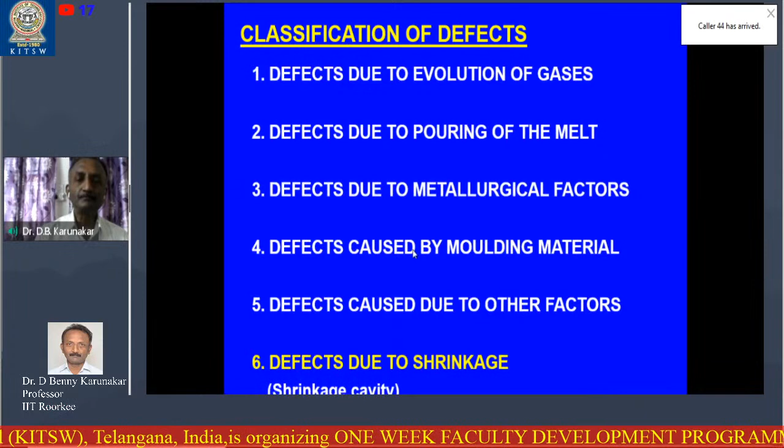Shrinkage cavity. Solidification causes a reduction in volume in almost all metals. So every metal undergoes shrinkage except cast iron. In cast iron, the carbon is in the form of graphite, so graphitization takes place, and because of that there will be bulging and the volume will increase during solidification.

Now there are three types of shrinkage for any metal. One is the liquid metal stage. In a vessel or container, we pour the molten metal, initially like this. There are always two temperatures for any cast metal: one is the melting temperature, the other is the pouring temperature. The pouring temperature is always higher than the melting temperature, maybe by at least 100 degrees centigrade above it.

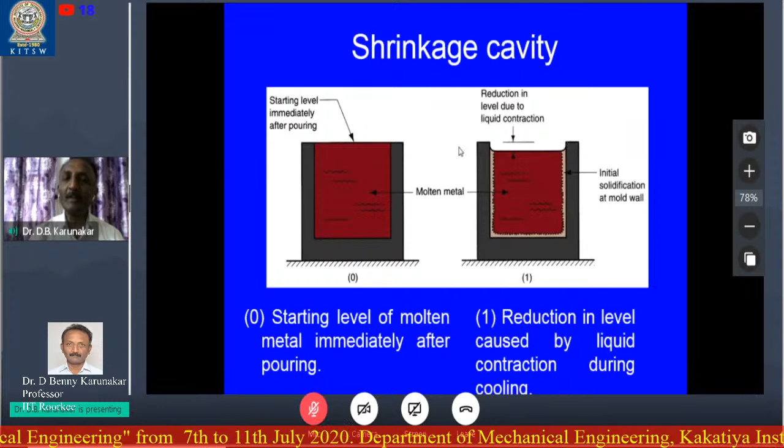When you pour the molten metal at the pouring temperature, it slowly comes down from the pouring temperature to the melting temperature. For example, if we pour molten aluminum at 750 degrees centigrade, from 750 to 660 it will be in the liquid state. During that stage there is liquid contraction, liquid cooling, so there is a contraction. This liquid contraction will be there whenever we are making a casting.

Next, there is a reduction in height due to solidification shrinkage. Once it comes to the melting temperature, there is no further change in volume due to temperature drop. In fact, during the phase transition, the temperature remains constant, but there is a shrinkage. This is known as solidification shrinkage. So far we have seen liquid shrinkage and solidification shrinkage.

During this shrinkage, the temperature remains constant till solidification is completed. After solidification is completed, it becomes solid, and then there is solid cooling, maybe from 660 degrees centigrade down to room temperature, 40 degrees. Is it liquid cooling during this time? No, it is not liquid cooling, it is solid cooling.

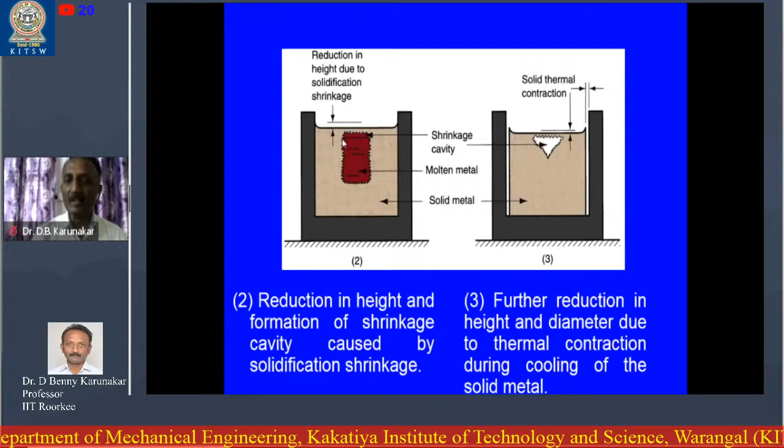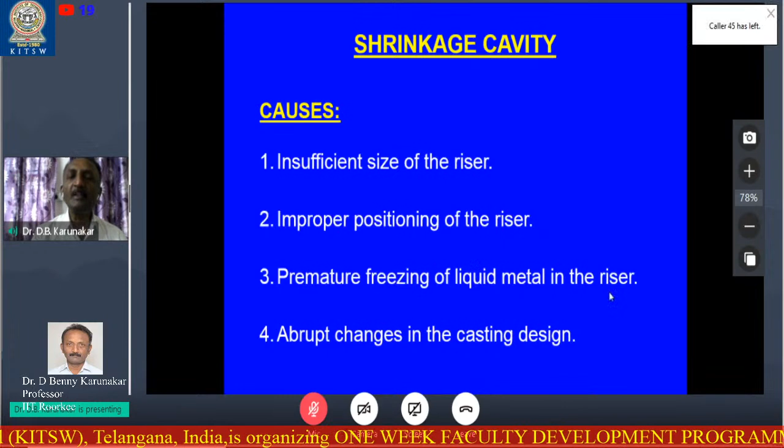Due to solid contraction, we use contraction allowances in the pattern. Now, if there is no riser, you see this casting has a shrinkage cavity. So here is a shrinkage cavity. Causes: insufficient size of the riser is the first reason. Improper positioning of the riser, premature freezing of the liquid metal in the riser, and abrupt changes in the casting design. These four factors are responsible for shrinkage cavities in castings.

Remedial measures: design the riser sufficiently larger, and second, ensure directional solidification. What is this directional solidification?

Now you see here, this is the casting and this is the riser. The solidification starts from the end of the casting, near the mold wall, and it starts propagating from right to left, like this. This is known as directional solidification.

Now I will show you another solidification, the progressive solidification. Progressive solidification starts from top to bottom, and the solidification propagates from top to bottom. Solidification is carried out in two modes: one is directional solidification, the other is progressive solidification. In any casting, both directional and progressive solidification will be there, but which solidification is better for us if we want to prevent the shrinkage effect?

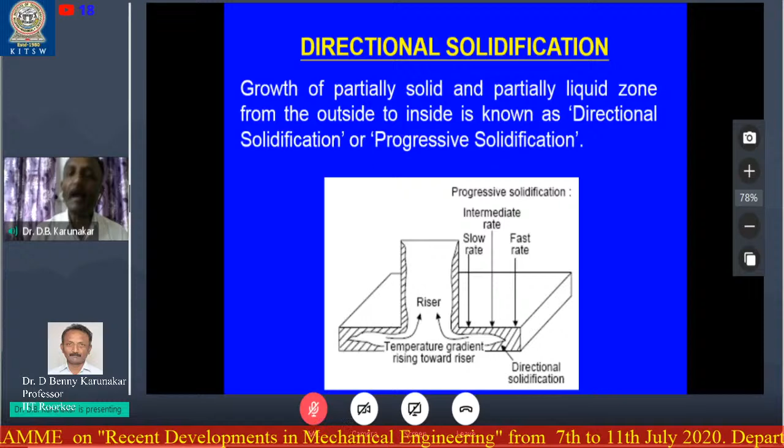Use chills at the required locations. You see here, in this case, there is gas porosity or shrinkage defect. The riser is here, and this portion is solidifying first, while the portion on the right side is not able to receive liquid metal from the riser, because the central portion is already solidified. So we have to prevent this, and for this purpose we can use chills.

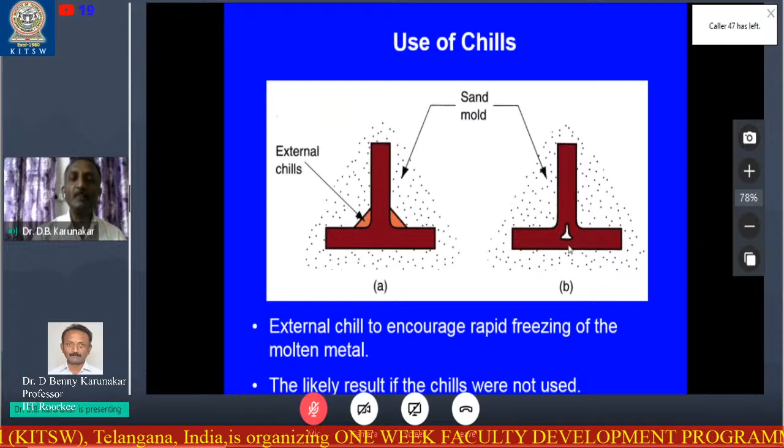Here again we are using chills. In the absence of chills, there will be a shrinkage defect, because this portion takes a larger time for solidification. When you use chills here, these metallic pieces absorb heat rapidly and ensure there is no shrinkage cavity at the center.

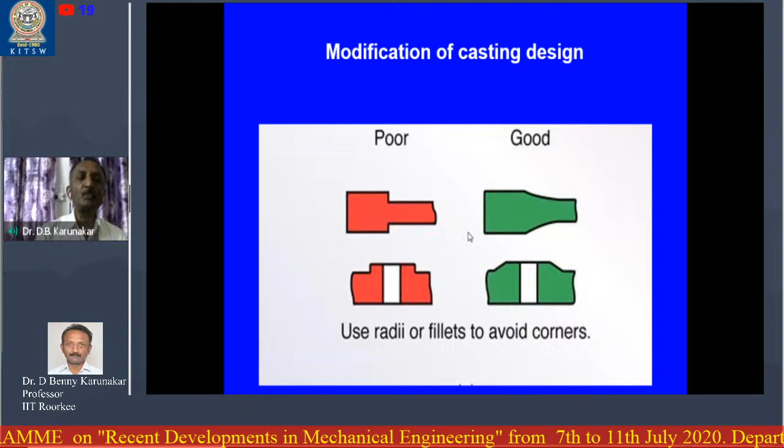Next, modify the casting design such that it ensures directional solidification. Now you see, this design is poor - if you keep the riser somewhere here, it may not feed this portion. But if you modify it like this, and place the riser somewhere here, it can supply the molten metal to this region.

Modification of the casting design - use radii or fillets to improve the solidification. This is a poor design, but it can be modified like this. If a radius is kept here and a fillet is made here, this will help us improve the solidification.

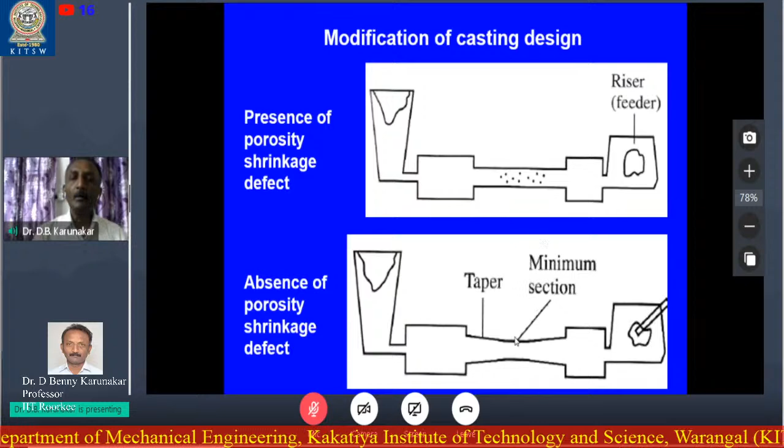Modification of the casting design: here we have made a taper. There was no taper here before. By making a taper, we have initiated solidification here, and the solidification propagates. So by making the taper, we are able to achieve directional solidification.

Next, use a blind riser. Now, the prime reason for shrinkage defect is insufficient molten metal in the riser. Do you know one fact - the efficiency of an open riser is only 15%. That means if there is 1 liter of liquid metal in an open riser, only 150 cc is used for feeding the casting. The remaining 850 cc is underutilized because it solidifies before it can feed the casting. The efficiency of an open riser is only 15%, but we can't avoid the open riser.

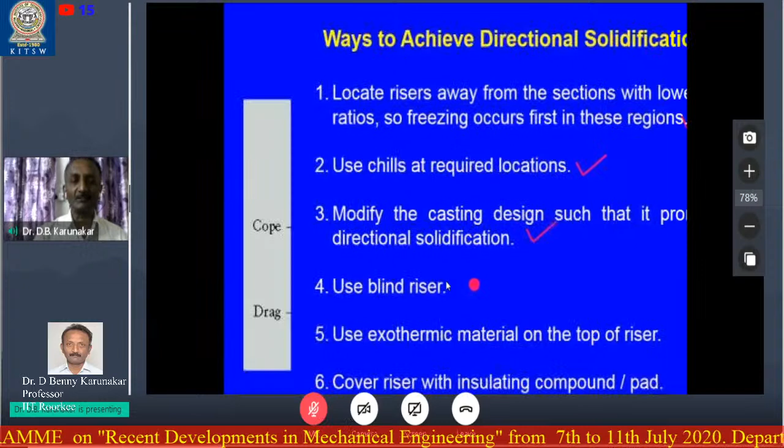Next, use exothermic material on top of the riser. These are the exothermic materials. What will happen? You see, this is iron oxide and aluminum.

When this mixture is kept on top of the riser, what is the problem? The efficiency of the open riser, as we've seen, is only 15%. We want to improve or increase the efficiency of the open riser. Suppose someone makes the efficiency 100%, it would be a wonder, but that's not possible. Maybe from 15% to 50% we can make, that itself is a big achievement. Or from 15% to 60%, that itself is a big achievement.

How can we? Let me ask you this question. Why is the efficiency of the open riser only 15%? When we pour 1 liter of molten metal, why is only 150 cc utilized for feeding the casting? Because the other portion also wants to feed the casting, but before it can, it solidifies, going into a helpless situation. Somehow, if we make that remaining portion also remain in the liquid state till it feeds the entire casting, then the efficiency of the riser is increased.

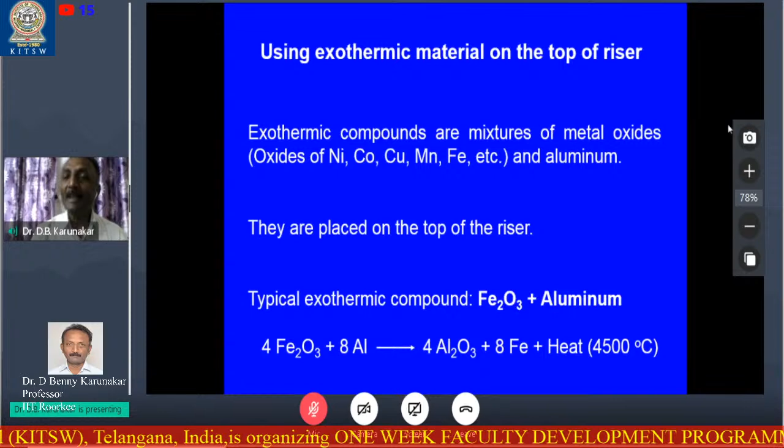So that is what we are doing by using the exothermic material, a mixture of iron oxide and aluminum, kept on top of the riser. Once kept on top, it suddenly undergoes combustion, an exothermic reaction, and a large amount of heat is generated. Because of this heat, the portion about to solidify in the riser continues to remain in the liquid state for some more time. Then that liquid metal continues to feed the casting. That is how the riser defect, or shrinkage defect, can be reduced in the casting.

Next, cover the riser with insulating compound or pad. Yes, another defect - why is the riser solidifying early? Because it is in contact with the molding sand, it is dissipating heat to the molding sand. That is how it is freezing along with the casting.

If the casting takes 30 minutes for solidification, the riser is also taking 30 minutes. Suppose the casting takes 30 minutes for solidification, but the riser takes 1 hour - then a miracle will happen. The entire metal present in the riser will be utilized for feeding the casting, and the efficiency of the riser will be extremely high. So that is what we are doing using this insulating material.

So here is an open riser. What we are doing is keeping an insulating material around the riser. This insulating material around the riser ensures that heat is not dissipated to the molding walls. So the molten metal in the riser continues to be in the liquid state for several minutes, even after the solidification of the casting. So till the casting is completely solidified, till every section of the casting requires liquid metal, the riser will supply liquid metal to the casting.

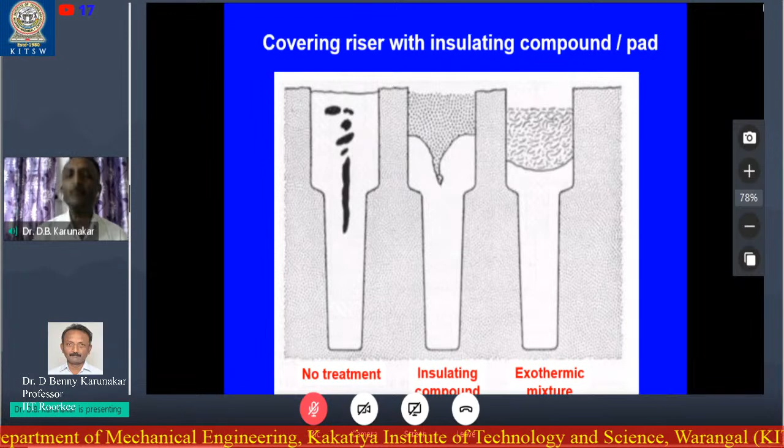Why does this happen? Because we are using the insulating cover around the riser. So by using an insulating cover around the riser, we can increase the riser's efficiency and decrease the shrinkage defect.

Friends, in this section we have seen the challenges and developments of the sand casting process, and the classification of defects. We first saw the defects due to the evolution of gases and different defects covered in that category. Second, we have seen defects due...